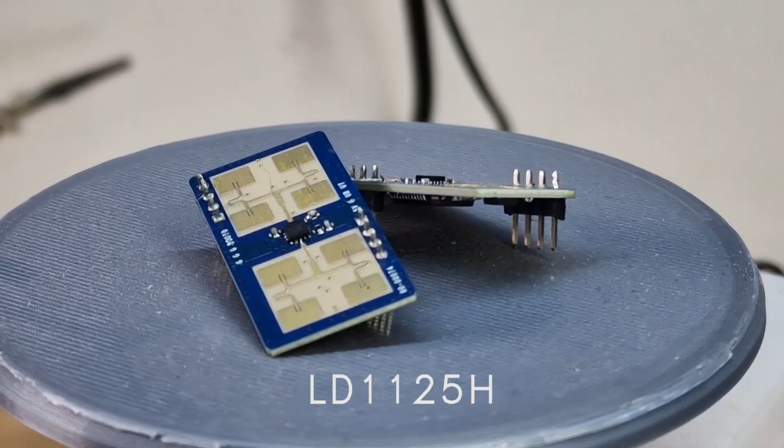These are cheap sensors, about 1.5 euros each, but they struggle when trying to detect a small motion. For instance, I cannot reliably detect presence when chilling on the sofa or working quietly at the desk. A millimeter wave sensor solves just this problem.

I picked this sensor, which is well supported on ESPHome. You can find the library in the GitHub link below. With this sensor, even the motion caused by simple breathing is detected. The cost is much more substantial, about 13 euros, so we're talking almost an order of magnitude more than the infrared sensor.

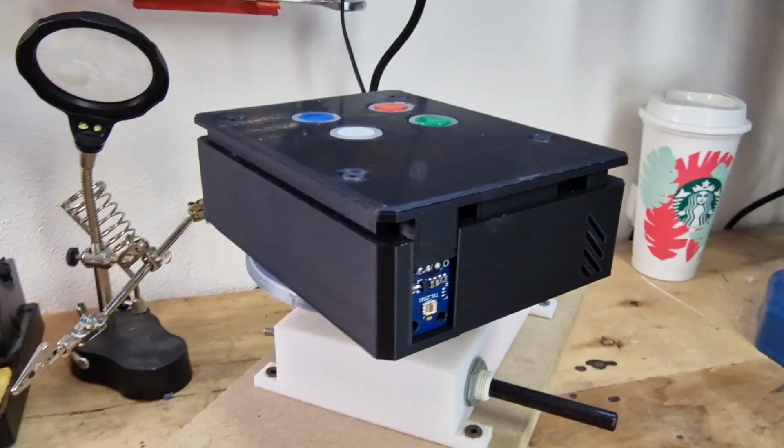The second issue I had with the previous version was due to the simple fact that, well, in a low light situation, it is hard to see the colors of the different buttons. It is kind of an obvious consideration, but one that I had not considered in this version. I tackled this problem by putting two LEDs on the PCB near the button and a plastic transparent diffuser around the button.

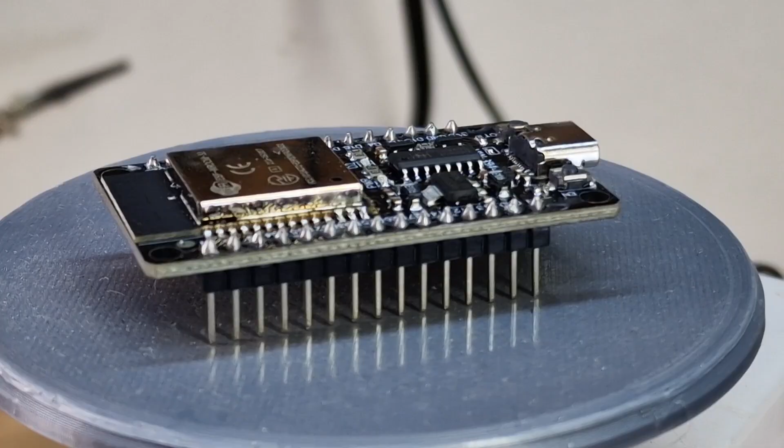In this way, when the LEDs light up, the plastic ring also lights up with the same color as the button. Now it's really easy to find the right button at night. I also switched to a more powerful ESP32, a bit more expensive but more powerful. Also available with a USB-C powered development board.

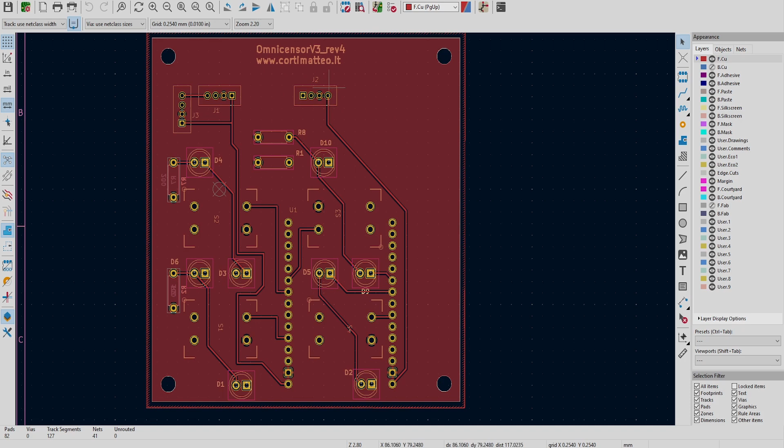As with the previous project, I designed the PCB using KiCad. I removed a few components which were not used, and the only thing of note is the sensor uses a 2mm pitch instead of the 2.54 pitch used elsewhere, but otherwise it is a simple PCB that basically routes the pins from the development board.

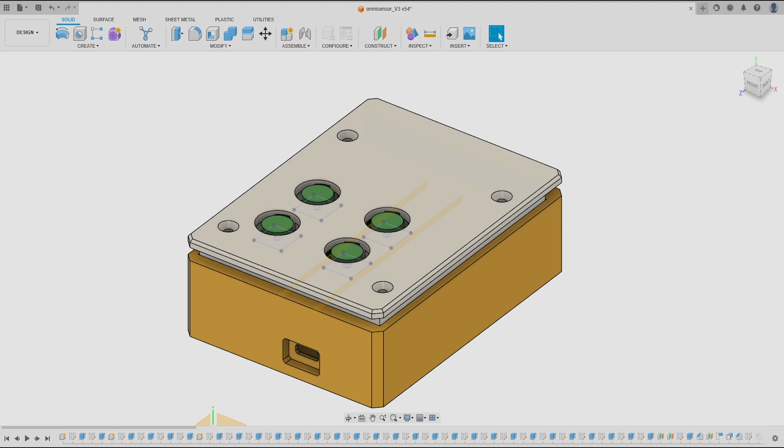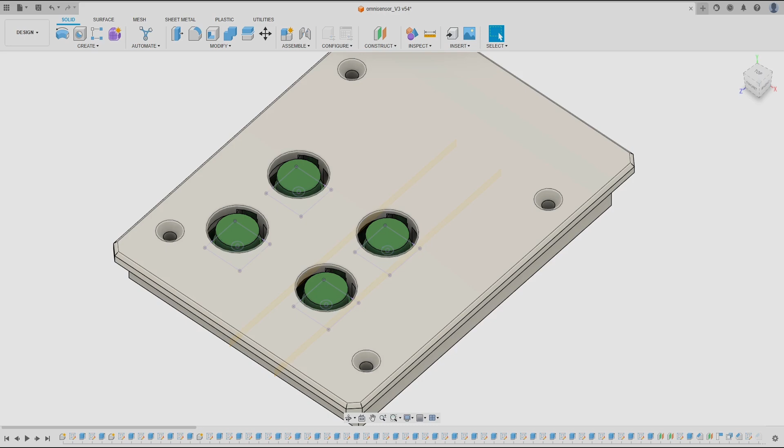The case also needed to be redesigned. This time particular attention was used in developing it, because now these LEDs will slot into these cavities. So the PCB will slot here, and the plastic insert will go around the buttons themselves.

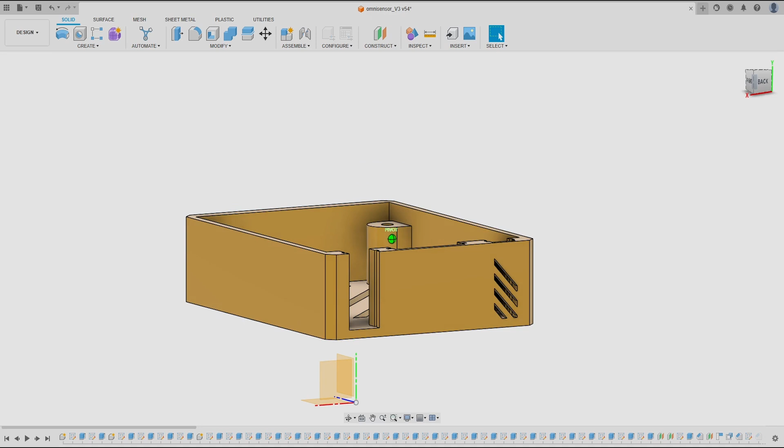In the front of the base we can find the sensor's slot. The millimeter wave sensor doesn't need to have a line of sight, so it can be hidden from view, which is quite a neat improvement design-wise. On the right we can find the temperature sensor, with a few slots for letting air in, and on the left we can find the slot for the light sensor. This obviously must see the outside world.

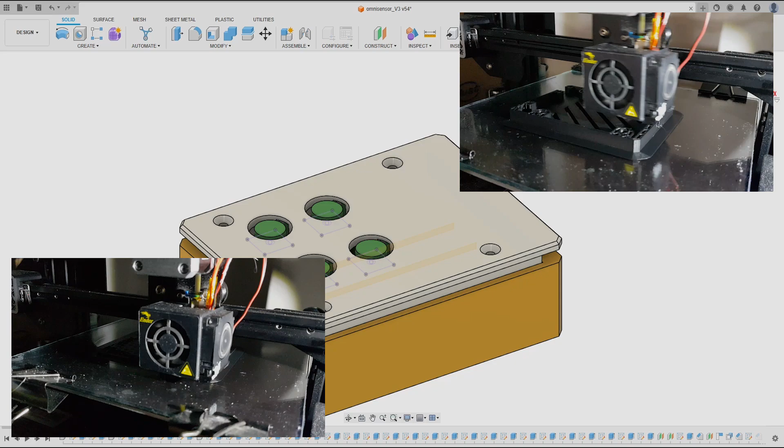I printed everything with my Ender 3 Pro. The base required 13 hours and 63 grams of filament, while the lid took about 8 hours and 44 grams of filament. I used dark filament for limiting the bleeding effect of the LEDs.

Regarding the software, I used as a starting point the example provided in the millimeter wave sensor library. I added the components already implemented in the old version of the hub, those being the temperature and humidity sensor and the ambient light sensor. Here we can find the 4 buttons, red, blue, white and green, and here the 4 LED groups.

I can go on and install it, manual download, and now it's starting to compile the binary file. This will take a while because it needs to fetch the dependencies needed for the millimeter wave sensor.

I prefer to use the legacy format because I prefer to use the old but trusty ESP flasher. So I can select the board. I plug the board into my PC, and now I can select the board. I can browse to the binary file I just generated, and I can flash it. And now the software is correctly installed on the board.

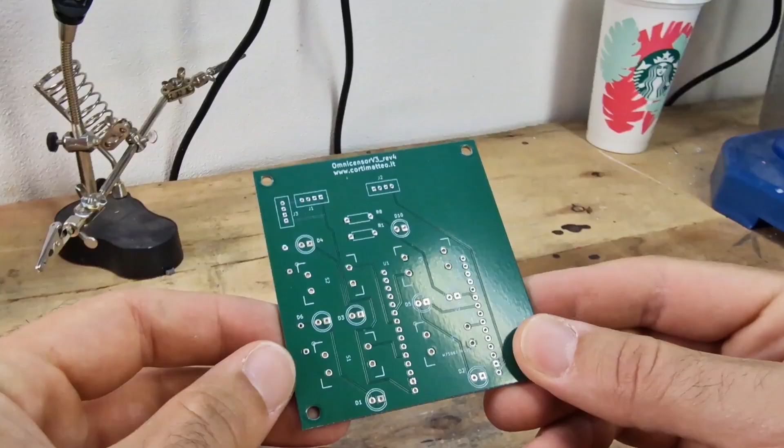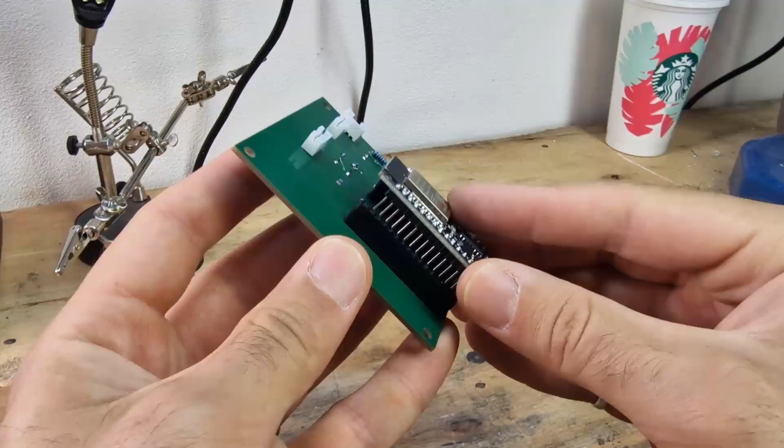With all the components at hand, it is just a case of populating the PCB according to this schematic. Here is the result. We then insert the buttons. They should obviously be color matching with the LEDs. The ESP32 goes in the back of the board with the USB facing the outside. We then plug in the millimeter wave, temperature and light sensors, and we're ready to slot everything inside the base.

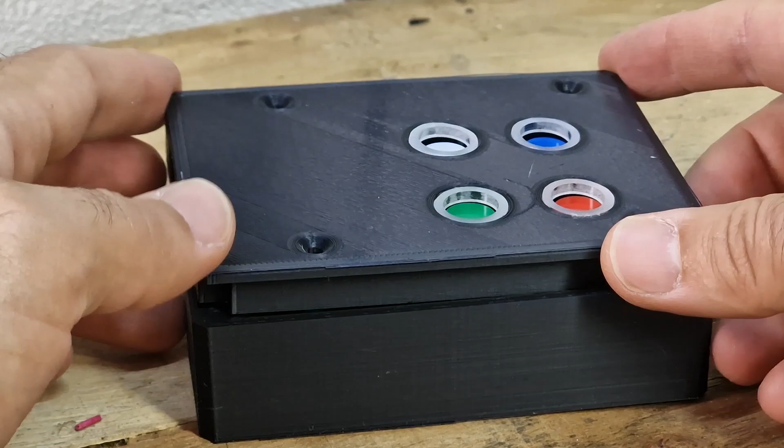We close everything with the lid and finally screw it down with 4 black M3 screws, which go into the brass inserts in the case. Here is the final form of the Omnisensor version 3.

So after having plugged in our device, we can go to Settings, Device and Services, ESP Home, and here we will be prompted to configure the device. Yes, we would like to add it, and we will place this device in the living room. So if I go here on Omnisensor Living version 3 revision 4, I can see the device.

For instance, I can turn on the lights. I can maybe turn off these lights so we will be better able to see. We can try to turn on the lights. So blue LED, green, red and white. Oof, I have misplaced the buttons. I put the white one here and the blue one here. I will need to swap it, but well, it is no problem.